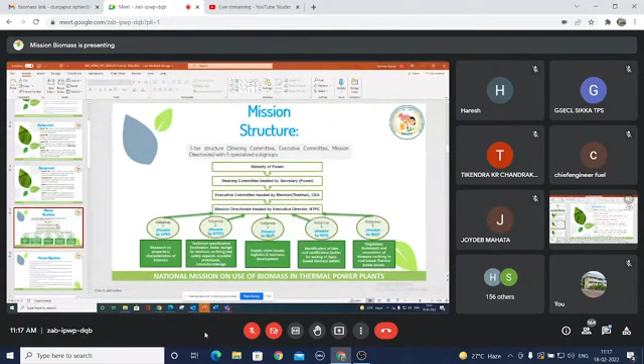Sir, now it is clear. You can start, sir. Sorry for the disturbance, sir. I think now it's visible to everyone. Can we go ahead, sir? Yes. Yeah.

So, sir, as I explained to you regarding the evolutionary journey of our mission, now I will talk something about the background, because we have to understand that a dream does not become reality through magic. It takes sweat, determination, hard work. The mission journey was not as smooth as it looks. The mission was carved out by the great vision of our visionary leader, persistent effort and a well thought out plan. Here in this slide, you can see every important step that led to this phenomenal start.

You can see that in 2017, there was issuance of a policy regarding biomass co-firing by the Ministry of Power and a subsequent advisory to all power plants and state governments by CEA. In September 2018, technical specification for biomass pellets was developed and shared with all. In December 2019, MOP constituted a committee under the chairmanship of Member Thermal CEA for developing methodology and to indicate rates of agro-residue based in pellet form.

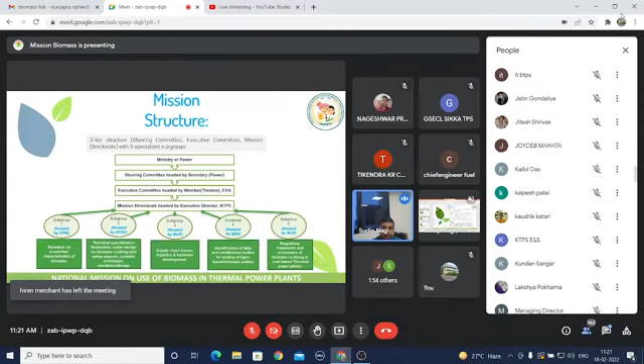Subgroup 3 was meant for taking care of supply chain issues, logistics, and business development. Subgroup 4, headed by BEE, was taking care of the identification of labs and certification bodies for testing of agro-based biomass pellets. Subgroup 5, headed by MOP itself, is taking care of all the issues pertaining to the regulatory framework and economics of biomass co-firing in coal-based thermal power plants. Next slide, please.

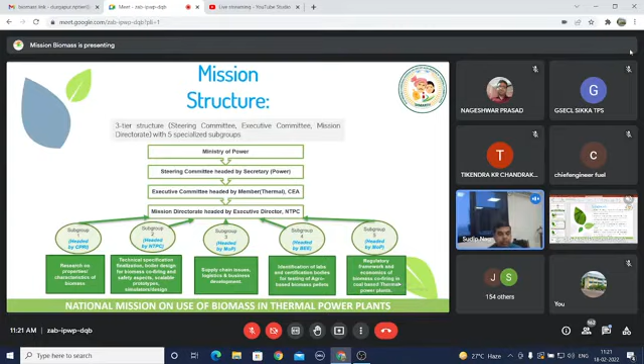biomass and boiler design to handle the higher amount of silica and alkalis in biomass pellets, to address the constraints in the supply chain of biomass pellets and agro residue, and training of personnel, to resolve the regulatory issues in biomass co-firing, to formulate mechanisms to provide initial capital and seed financing to encourage entrepreneurs and SMEs to establish pellet manufacturing facilities, to identify critically needed infrastructure and encourage necessary investment by working with government and stakeholders as well as industry and academia, to sensitize all stakeholders like ministries, departments, state governments, farmers, local bodies, agencies, etc.

It was also the role of the mission to prepare guidelines, release of RFQ, RFP and other requisite documents, selection of host institutes, signing of MoUs, release of funds, preparation and evaluation of budget, organizing meetings of expert committees and expert groups, etc. Next slide, please.

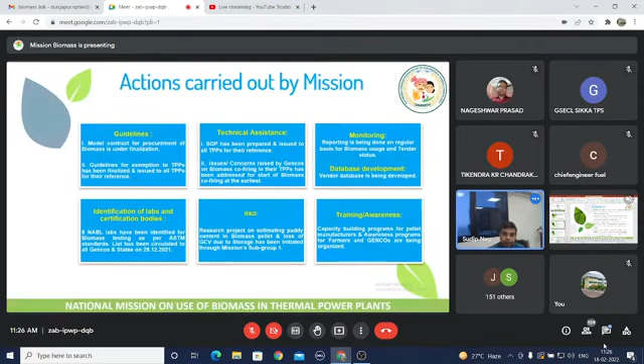Regarding monitoring, reporting is being done on a regular basis for biomass use and tender status. A database has been developed for the vendors. Identification of labs and certification bodies: 8 NABL labs have already been identified for biomass testing as per ASTM standard, and the list was circulated to all GENCOs and states in December 21. A research project on estimating paddy content in biomass pellets and loss of GCV due to storage has already been initiated through mission subgroup 1. Regarding training and awareness, capacity building programs for pellet manufacturers and awareness programs for farmers and GENCOs are being organized. Next slide.

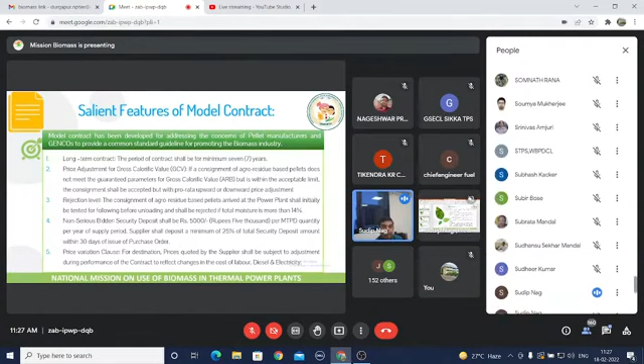As I was explaining regarding the model contract, it has been developed to address the concerns of pellet manufacturers and GENCOs and provide a common standard guideline for promoting the biomass industry. It's a long-term contract; the period shall be a minimum of 7 years. There is provision for price adjustment for GCV, provision regarding rejection, a security deposit for non-serious bidders, and a price variation clause: the destination price quoted by the supplier shall be subject to adjustment during the contract to reflect changes in the cost of labor, diesel, electricity, etc. Next slide.

Two farmers awareness programs have been conducted at NPTI Faridabad and Nangal for sensitizing farmers regarding the economic use of agri-residue. A total of 65 farmers participated in Faridabad and around 72 in Nangal from various districts of Punjab and Haryana. Next slide. Two capacity building programs have also been conducted for pellet manufacturers at Badarpur and Nagpur. A total of 82 manufacturers participated in Badarpur and around 60 in Nagpur on 30/11/21.

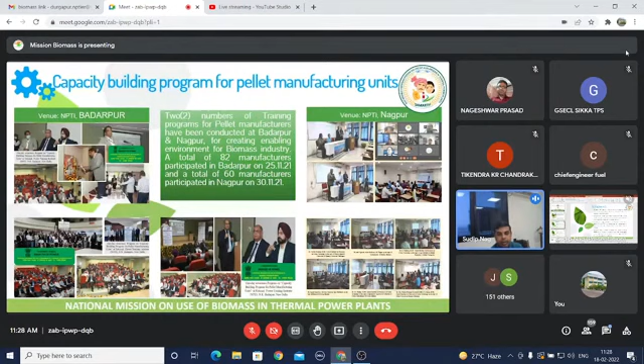So, Government of India came up with this co-firing of biomass that will solve all these problems, including improving the air quality index. It will create additional income, and it will definitely reduce the burning of agro residue, which is leading to this air pollution problem, as well as generate employment opportunities and establish decentralized pellet manufacturing, which will increase employment.

So, regarding the policy, in November 2017, Ministry of Power issued a policy regarding co-firing of biomass, in which it was not mandatory to co-fire biomass in coal-based power plants. But in the subsequent amendments and revised policy of 2021, it has been made mandatory to fire 5% biomass. Regarding the regulations, this policy covers two major regulatory aspects. Number one is renewable purchase obligation, the non-solar one, and the second is merit order dispatch. So let me cover the.

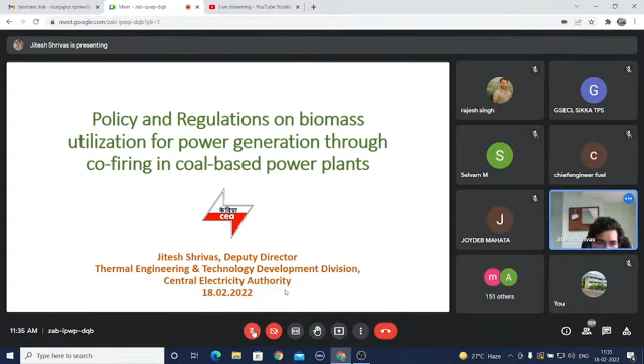Excuse me sir. Yes. Sorry, your presentation is showing hide. You are on the first slide only. I have not shifted it. Okay. Please remove the hide. Oh, okay. Is it okay now? Yes sir. Okay. So let me start with the presentation.

This is the background which has been discussed in the inauguration session as well as by my previous participant, that India generates a lot of waste every year, out of which a large part remains unutilized. So we have surplus biomass available in India. Around 40 to 50% of the total paddy straw is burned in the field. This can be utilized to generate power rather than burning in the fields. Biomass co-firing along with coal is a method of generating carbon neutral electricity through India's existing rich coal-based power infrastructure. So it will add on and reduce the stress on fossil fuels.

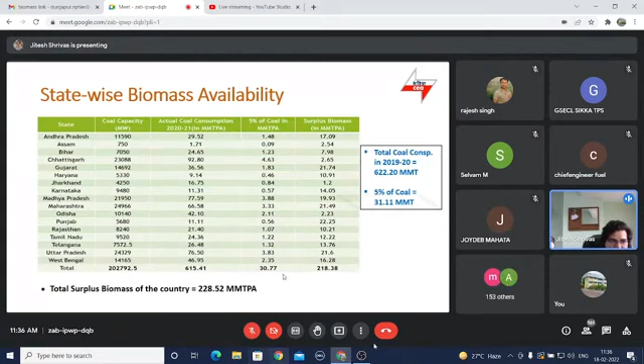Now in this slide, the objective is just to show that we have surplus biomass in the country. We have 228.5 million metric tons per annum of biomass available. We have covered 17 states, and there is data of coal capacity and the surplus biomass. So there are some statistics in this slide.

Okay, the benefits I have already discussed: it will eliminate or minimize the burning of agro residue. It will improve the air quality index. It will create additional income. It will encourage the establishment of decentralized pellet manufacturing and thus generate employment opportunities.

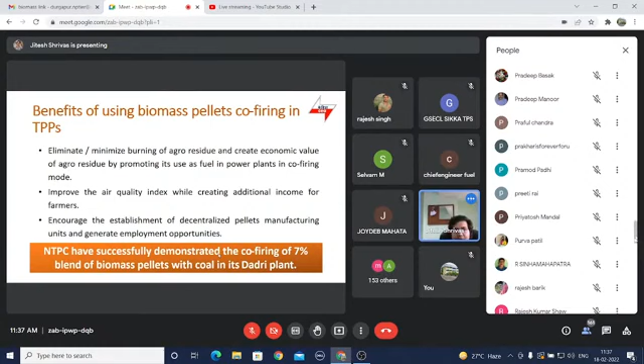The reason this biomass has come through is because NTPC has successfully demonstrated co-firing of a 7% blend of biomass pellets. So because of NTPC, this has been an encouragement, and therefore we have a policy on this. So in November 2017, the MOP came up with this policy.

All fluidized bed and pulverized coal units, except those having ball and tube mills, both for public and private generating utilities, the policy holds, shall endeavor to use a 5 to 10% blend of biomass pellets, considering the safety aspects. It is also said that CEA shall issue a specification for the pellets.

The appropriate commission will determine the compensation to be allowed for the increase in tariff for cost of generation on account of using biomass pellets. That will be taken care of through ECR, that is energy charge rate, or the change in law, which we will be covering in the subsequent slides. This is the regulatory issue, merit order dispatch. So the increase in cost of generation will not be taken into account for the purpose of merit order dispatch of electricity.

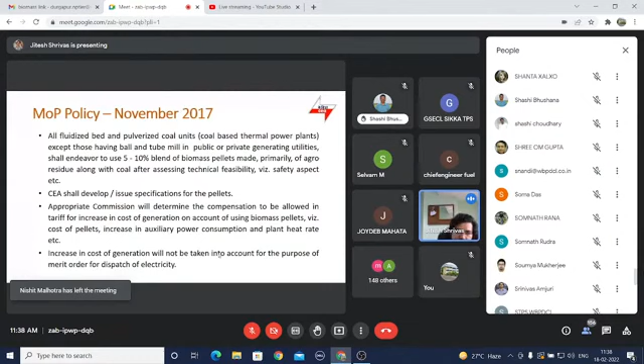With the coming out of this policy of 2017, there were a few committees and reports relating to biomass. Number one was the technical specification, which holds what should be the minimum criteria or technical specification of the pellets, both for non-torrefied and torrefied ones. Then, under the chairmanship of Member Thermal, CEA, a committee looked into the methodology for arriving at the rates.

So regarding the agro-based residue pellets, this was based on the calorific value. If I'm not wrong, for non-torrefied pellets the cost was around 1.9 rupees per kg per 1000 kilocalories, and for torrefied it is 2.1 rupees per kg per 1000 kilocalories. Right?

Then we also have other committees under the Additional Secretary, Ministry of Power, to look into merit order dispatch, the regulatory issue. So it has been decided that the increased cost will not be considered for merit order dispatch.

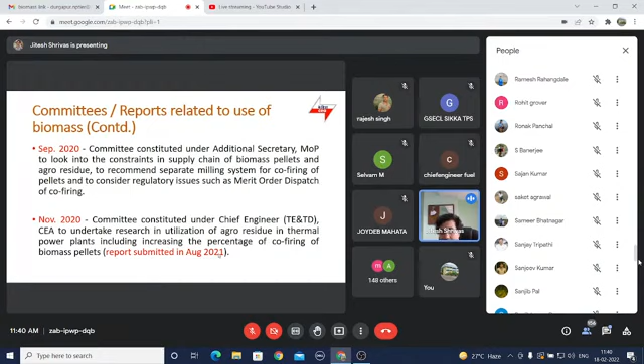Then we also have a committee constituted under the Chief Engineer, Thermal Engineering Technology Development, CEA, to undertake research on utilization of agro-residue in thermal power plants and increasing the percentage of co-firing of biomass pellets. The reports were submitted in August 2021. The areas of concern were the research areas identified in this report. Subsequent to which there have been subgroup formations under the biomass mission, which have been taking up this report's findings.

So after this policy, another regulatory issue: the non-solar renewable purchase obligations. The power generated from co-firing of biomass in coal-based thermal power plants is considered renewable energy, and this is eligible for non-solar RPO. So this was a major amendment.

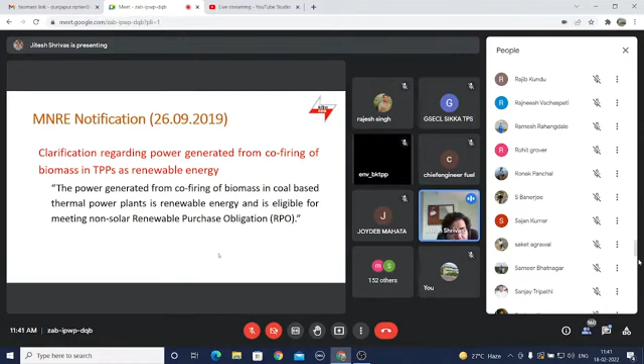Now, coming on to the MOP policy revised with subsequent amendments of October 2021, it made firing of 5% biomass mandatory. So for different types of milling systems, according to torrefied and non-torrefied pellets, we have this. For example, the bowl mill mandatorily uses 5%, and the obligation shall increase to 7% with effect from 2 years after the date of issue of this policy. The second one is the ball and race mill, which will be using only torrefied pellets. 5% is mandatory, and 2 years from the date of issue of the policy, the obligation will increase to 7%.

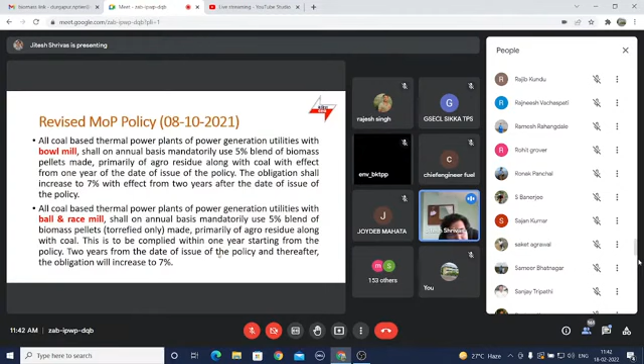Regarding the ball and tube mill, this will be using 5%, but the ball and tube mill has certain technical constraints. So for this one, the volatile content has been kept under 22%. Apart from this, we have cases, for example, a reserve shutdown, or not being able to operate due to merit order dispatch. If you have these constraints, then you have to increase the percentage of co-firing up to 10% in other operating units or plants.

Okay. Exemption and relaxation for co-firing. For example, if the power plants are seeking exemption for co-firing, that will be considered on a case-to-case basis. There is a 6-member committee headed by Chief Engineer TE&TD to look into this matter, and the representatives are from NTPC, BHEL, CPRI, Ministry of Agriculture, and Mission Directorate.

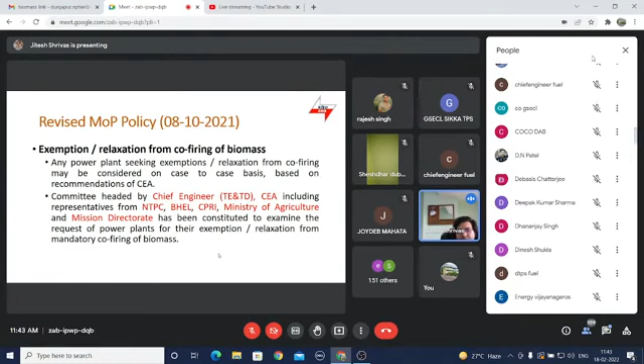Okay. So these are the key highlights of this one. The policy will be in force for 25 years. The minimum percentage of biomass for co-firing will be reviewed from time to time. Minimum contract period for procurement of biomass pellets by generating utilities is 7 years, so as to avoid the delay in awarding contracts with generating companies every year, and also to build up a long-term supply chain.

Okay. In the morning I heard that there was some query about the capex and all those things. So this slide is for Sir, who has asked this question. For projects set up under Section 62 of Electricity Act 2003, the increase in cost due to the co-firing of the biomass pellet shall be passed through in energy charge rate. And for projects under Section 63, the increase in ECR due to biomass co-firing can be claimed under change in law provisions.

Apart from that, additional cost on ECR shall not be considered in deciding merit order dispatch of the power plant, so it remains untouched. And obligated entities such as DISCOMs can meet their RPOs by buying such generation of co-firing, as per the MNRE notification 2019.

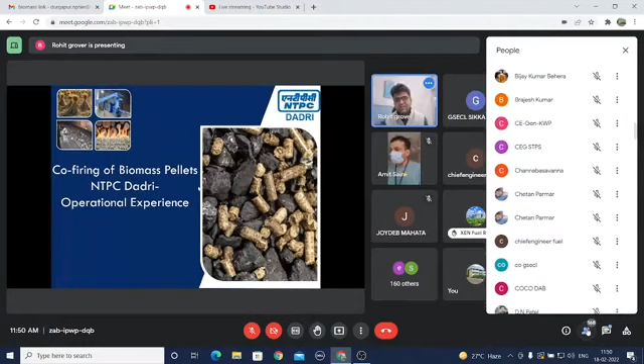We all know why we need to fire biomass—this was because of the huge smog which left Delhi NCR paralyzed due to air pollution. So we won't discuss much on this.

We'll focus more on the technical part. My presentation will discuss some background, the first phase trial run of operation—how we started it, what is NTPC Dadri's experience over a period of time, what requirements you need for any power plant before going commercial, what the SOP is, and what is the way forward.

As previous presentations mentioned, we have a huge stock of biomass lying in the fields which is being burnt unnecessarily and creating air pollution. So we can bring that into the economic value chain, creating a win-win situation for nature, air, power producers and farmers, and also generating jobs and employment opportunities.

In 2017, because of the 2016 smog, NTPC Dadri was selected as the pilot project for implementation of co-firing pellets with coal. As operations people, we are totally scared when asked to burn any new fuel in our boiler which wasn't designed for it. There were many perceptions and apprehensions about whether this fuel would be sustainable, whether there would be fire risk, or whether it would lead to mill choking. All these problems were discussed before firing in NTPC Dadri mills.

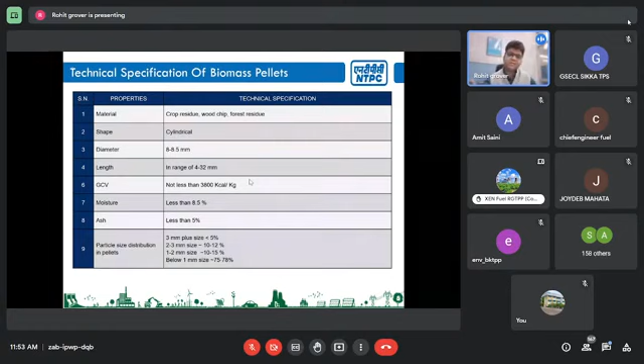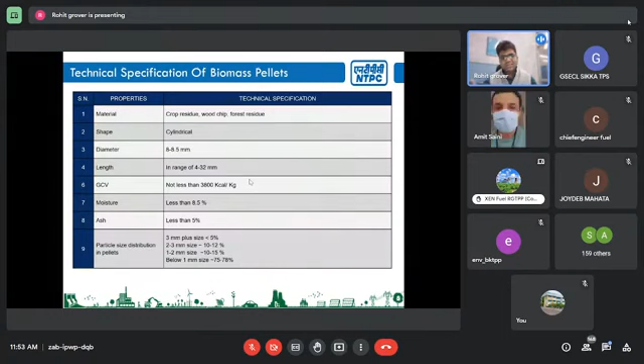Before firing, we need to indent the pellets from the pellet manufacturer. These are the specifications we raised and received at our plant—what should be its shape, length, kilo GCV, and moisture content. Moisture content is very important in pellets because they are hygroscopic in nature and catch atmospheric moisture very easily. So moisture content is important since we accept or reject a lot based on it, as we'll see in coming slides. Particle size is also mentioned here.

This slide is technically important—it shows the distribution of proximate analysis of 100% coal versus 100% biomass. As you can see, most parameters are the same. Regarding GCV, gross calorific value used in NTPC Dadri is around 3200 to 3800 kilocalorie per kg. With 5% biomass blending, it more or less remains the same, as shown in the last column.

What is concerning is the volatile material column—volatile matter contained in biomass is huge, around 67%. This is a huge concern for an operation engineer at a power plant, because I need to think about whether my mills will be able to pulverize that, and whether there will be any ignition in the mill itself. This was a concern because for 100% coal, volatile matter is just 22% in Indian coal, but in biomass it's 67%.

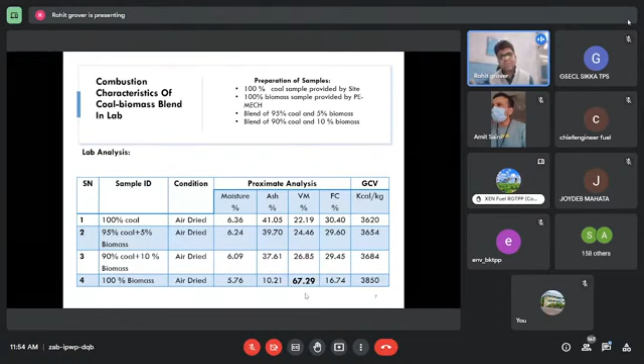So that is all which led to whatever you will see, what are the precautions which we are taking, what SOPs we have formed. These are all more or less related to this because of high volatile matter content in biomass.

So basically, if you are firing biomass... your slides are not visible to us. My slide is not visible.

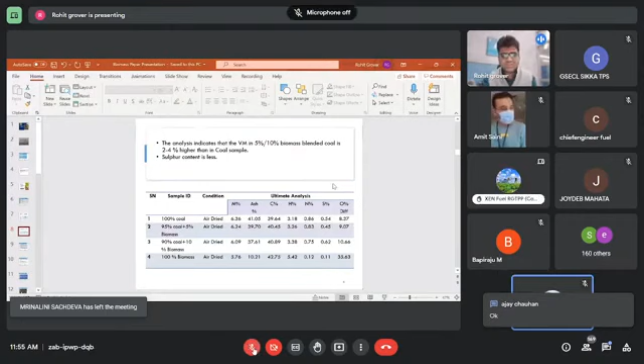Okay, then let's come back to the topic again. So what I was trying to prove with this slide is that the nitrogen content, atomic nitrogen content, and the sulfur content in the coal and in the biomass.

In biomass, you can see it is less. So if we are blending any amount of biomass, we are basically contributing less sulfur dioxide into the atmosphere. So less sulfur dioxide, less nitrogen dioxide and NOx content. This also helps the environment, and we are helping in greenhouse gas reduction, which we all know is happening if we are blending, for any amount of blending it is helping in that.

So what our NETRA wing did was the combustion analysis of the biomass sample. The first point they got was that volatile matter in the biomass starts releasing at 200 degrees Celsius. The volatile matter present in biomass, we know, is 65-67%, and it starts releasing at 200 degrees Celsius.

While in case of coal, it starts releasing beyond 300 degrees Celsius, so beyond 300 degrees Celsius. So we know that as an operation engineer, what we monitor is the mill inlet temperature.

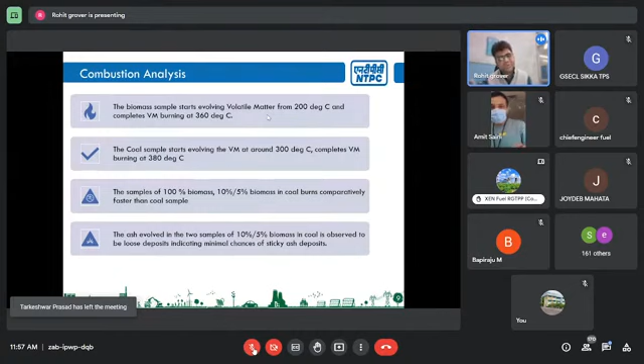That is the cause of concern, because if I am keeping my mill inlet temperature greater than 200 degrees Celsius, there is a chance that the volatile matter present in the biomass might get released, or will definitely get released beyond 200 degrees Celsius. Then, if it reaches the ignition temperature, it might lead to fire in the mill itself, in the coal pipe itself, which we don't want as an engineer, as a desk engineer, as a unit controller. We don't want that. So this was the cause of concern, and this required that we keep the mill inlet temperature below 200 degrees Celsius if we don't want any fire to happen in the mill.

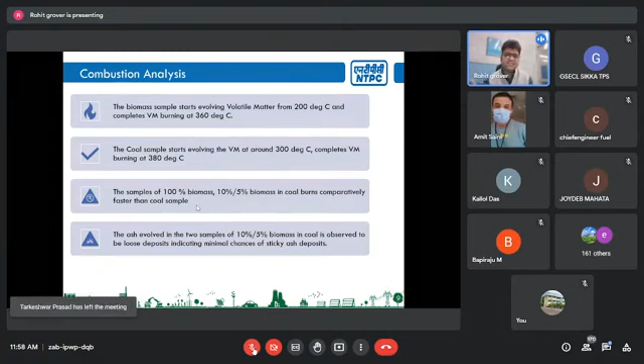Now, second thing was, we know that volatile matter content in the coal starts releasing at 300 degrees and completely burns at 380 degrees. The samples of 100% biomass, 10% biomass and 5% biomass completely burn, and they burn basically faster, because there is high volatile matter content in biomass. So if we are blending the biomass, we are increasing the volatile matter content of the whole sample itself, leading to faster burning of the coal sample.

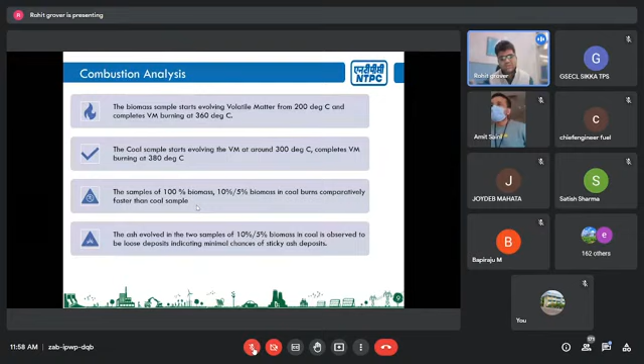Also, a prime cause of concern is that when we burn any fuel, the ash content left behind is also a cause of concern. That ash content should not be such that it hampers the boiler or deposits in the boiler. So with 10% blending, it was observed that it is not hampering any water wall tubes or superheater tubes or anything like that. So it was not a matter of concern that it would affect our boiler in terms of ash deposition or ash fouling point increase.

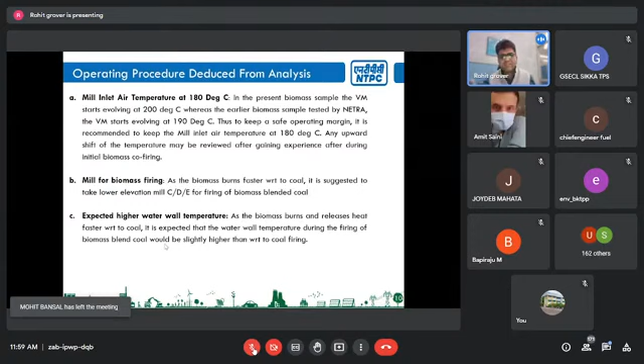So the basic rough operating procedures which we deduced from this analysis was that we have to keep the mill inlet temperature at 180 degrees Celsius. On a safer side, we kept the mill inlet temperature at 180 degrees Celsius, because we don't want any volatile matter to release in the mill itself during pulverization.

And then, as we know that biomass burns faster with respect to coal, it was suggested to keep the lower mills in service, like C, D, E. Suppose if there are 6 mills A, B, C, D, E, F, we tried to first start firing in the bottom mills C, D, E, so that if it is burning faster, it will help.

We had some apprehension that it will lead to reduction in our superheated temperatures, but it didn't happen so, which I'll share in the subsequent slides also.

Then we expected higher water wall temperature, as I mentioned that biomass burns and releases heat faster with respect to coal, so it was expected that water wall temperature will be higher, but it was just slightly higher. It didn't hamper any boiler parameters or superheated temperatures, which I'm going to show in the subsequent slides also.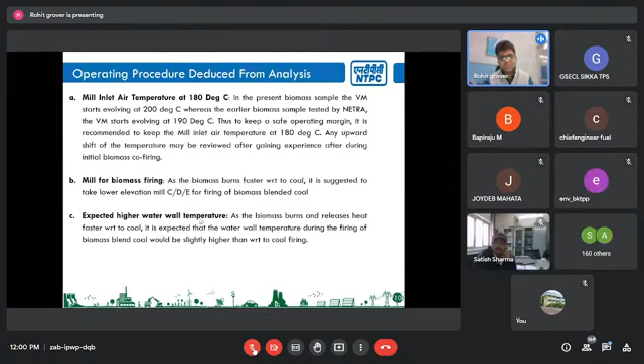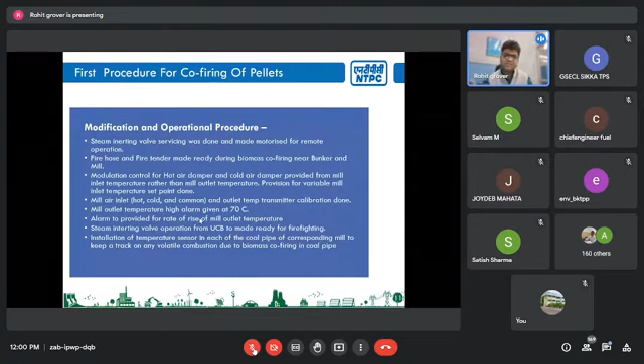Then, regarding the operating procedure modifications done when we were charging biomass firing for the first time: the first and most important point is that we serviced our steam inerting valve. As an operation engineer, we all know that a steam inerting valve, in case of any mill fire, is a valve provided for steam dumping in the mill to prevent fire from spreading. That source of steam inerting is mostly aux PRDS, which is present in our boiler units.

So that steam inerting valve, since we were firing coal, was mostly redundant and not in operable condition. So before firing this blended mixture, we serviced our steam inerting valve, and we also provided one motorized valve in series with it.

Earlier, in the original drawings of the 210 megawatt and 500 megawatt units provided by BHEL, the design was that there was only a local manual valve provided near the mill. Within each individual mill, there was one manual valve. So in case of any mill fire, we used to open that valve, and then the mill fire could be stopped.

But since it was decided to fire biomass, to make it easier for operation engineers, a motorized inerting valve was also provided in the control room itself, and its operation was tested. So in case of any mill fire, that valve could be opened from the control room, and the mill fire could be stopped. That was a prerequisite before firing any co-firing or blended fuel.

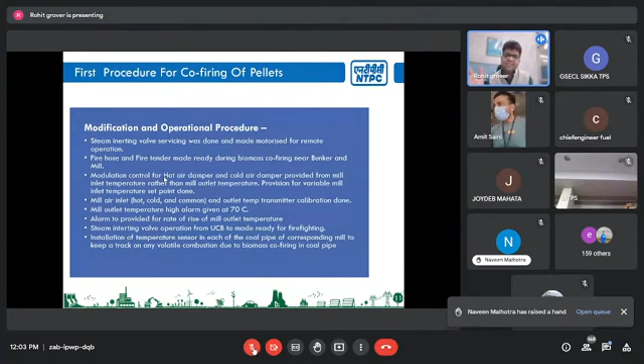Then modulation control for the hot air damper and cold air damper was also provided. This is the part where logic comes into play. We all know that when we fire fuel in the mill, the amount of air is decided by the hot air damper, and the outlet temperature of the mill is controlled by the cold air damper. Suppose if I keep my outlet temperature at 80 degrees, the cold air damper opens according to the requirement, and the mill outlet temperature will remain at 80 degrees.

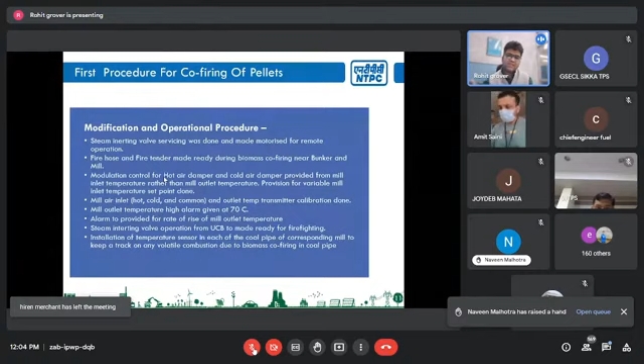But now my main point is not to maintain the mill outlet temperature, it is to maintain the mill inlet temperature, as we've seen in the previous slide, which needs to be controlled below 200 degrees Celsius. So with the help of our C&I team, the logic was modified, and now the cold air damper operates based on inputs from the mill inlet temperature. Then different alarms were provided in the mill UCB, for timely action by operation engineers.

So if any mill is being selected into biomass mode, then if there is a mill outlet temperature greater than 70 degrees, there is an alarm. If there is an increase in mill outlet temperature, there is an alarm. So there are different alarms also provided.

And also there were 4 different temperature sensors which are provided in the different coal pipes also. In tangential firing, a mill provides 4 different pipes which go to every corner of the boiler basically. So in each and every pipe there was one temperature sensor provided to monitor whether there is a fire in our coal pipe, whether there are no fire incidents in our coal pipe. That was also provided.

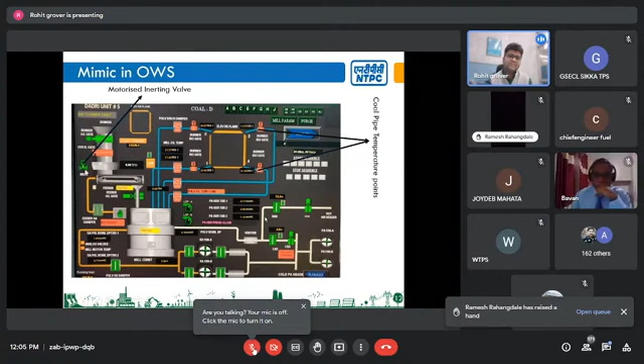Now this is the mimic. What I have told, this is the max DNA mimic which is provided in our control room. So this is a mill page, basically mill Delhi page, as you can see, coal D. In our terminology we say D for Delhi. So this is the mill. These are the 4 temperature points which were additionally provided to monitor the coal pipe temperatures. And this is the inerting valve which I was talking about. This is the motorized valve which is provided additionally in the mills readied for biomass firing.

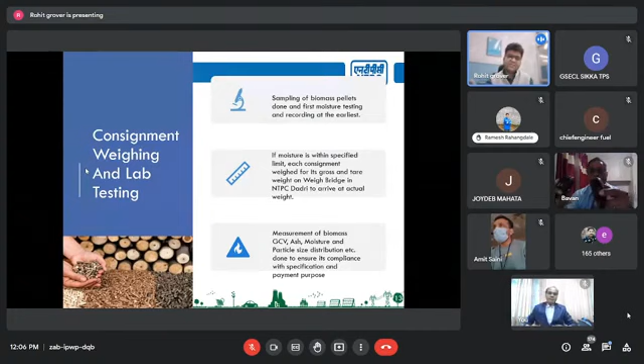Now, as this was all about the SOP, whenever we get any consignment, our chemistry department receives the pellets, takes the sample, and measures the GCV and the moisture. If it is in the acceptance range, we receive that consignment, and then it is sent to our CHP yard.

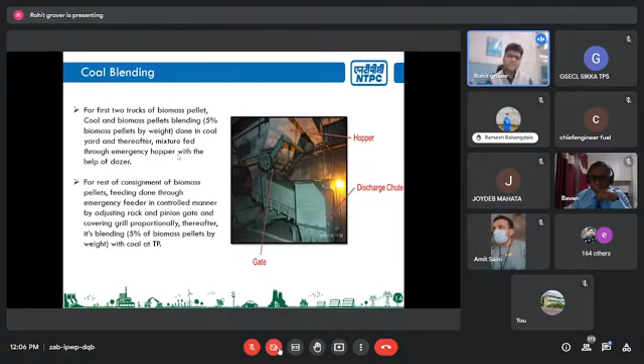So what we did was how to do blending. That's also a major question, because now there was a separate hopper, which was previously not in use, used to store the biomass, and with the help of this rack and pinion arrangement, the opening of this gate allowed us to drop the amount of biomass which we wanted to blend. So you can say it's a rough estimate, but we tried to do it that way. So we did the blending for 5% initially.

So there was a track hopper. From there coal was being carried and lifted to the transfer point. That transfer point is basically this one. Below this, the conveyor belt is going for the coal, and above that, we are feeding the biomass over it. From the emergency hopper, the biomass is fed to the transfer point. And from the transfer point, that blended fuel is sent to the coal bunkers.

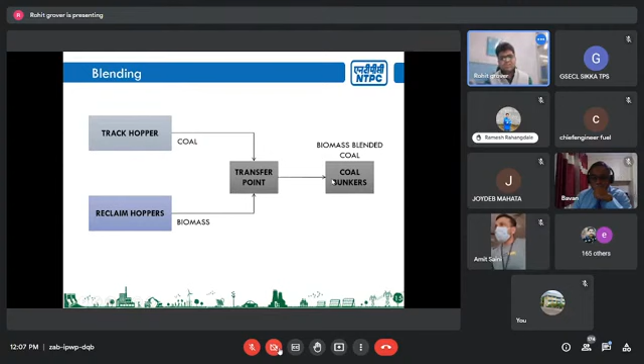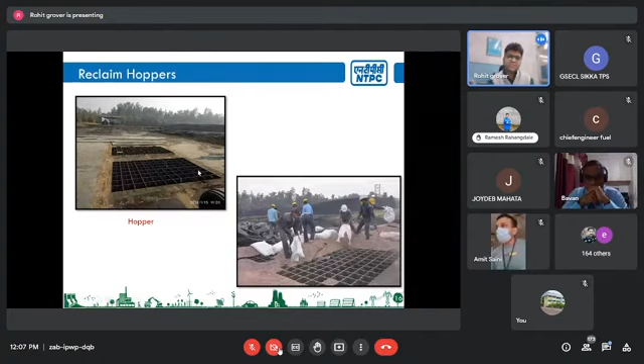So this is the hopper which we are talking about. When we receive the pellets, this is how they were manually unloaded over this hopper. But now a truck tippler has been installed in NTPC Dadri because receiving pellets has become a regular phenomenon, so this is not done manually now. These pictures are from the first time it was blended. We received the sample, then it was collected in the hopper lying below this. This is the blended mixture which is being carried by the conveyor to the bunkers.

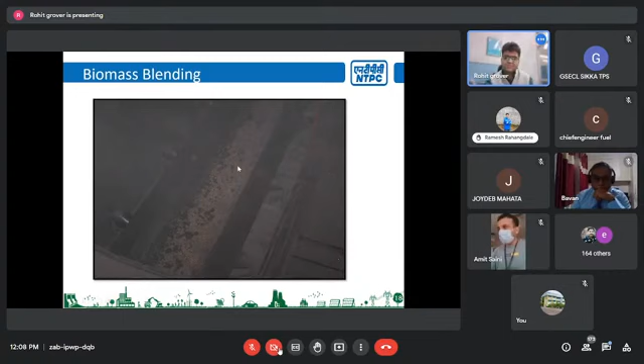Now, for the firing for the first time, we made sure that the mill outlet temperature should be in the range of 60 to 65 degrees. Mill inlet temperature should not be more than 180 degrees, as I have mentioned. The PA header pressure was kept slightly higher. Normally in our mill, it is recommended around 740 to 760 mm of water column. The primary air is the air which removes the moisture from the coal and carries the fuel to the boiler itself.

That pressure was kept slightly higher because we were apprehensive whether our fuel would be lifted from the mill or not. And then pre-start and post-shutdown purging of the mill was also made mandatory. And all the mill parameters were monitored on a continuous basis.

Now, the last line is very important because we made sure that mill inlet temperature should not go beyond 180 degrees Celsius. Just to make you aware, earlier there was only one point available for mill inlet temperature. So, for increasing the redundancy, another point was provided for mill inlet temperature. So there were two different points from where our PID controller was taking the command.

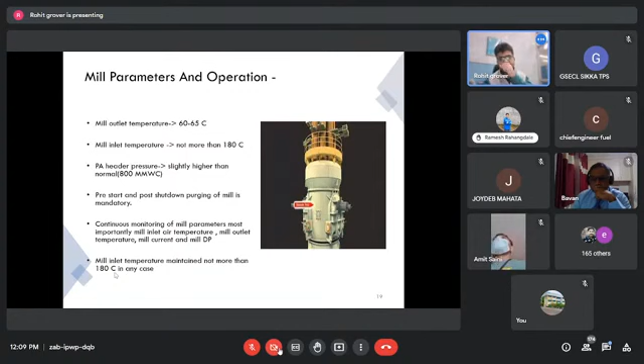Mill reject system was also kept ready and it was kept under observation. Then local operator was also deployed. In case of fire also we had prepared some SOP, कि अगर आग लग जाए, in case अगर हम पहली बार जब fire करें, अगर आग लग जाए तो क्या करें? But to assure you, in the last 6 to 7 years of our co-firing of biomass with fuel, no fire incidents have been reported till now.

Now, fire tender was also deputed, and then the flue gas temperature was also monitored in the superheater zone, and then clinkering and slagging tendency was also monitored with the help of local people, and with the help of bottom de-ashing time also. Soot blowing and LRSB also were kept ready, in case there is any deposition of soot, so we should be prepared for anything. This is all which we are talking about when we were charging it for the first time.

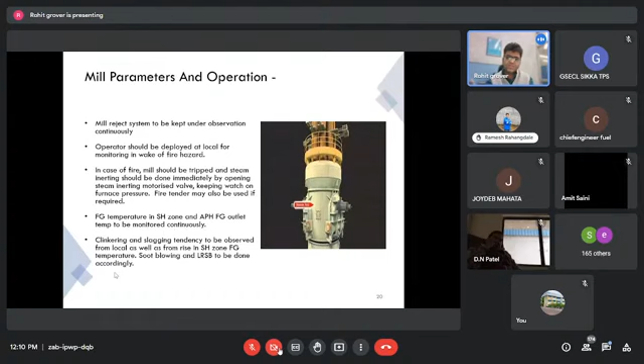But now the things have become much more simpler. This is just the apprehension which you all must be having, कि अगर हम अपने boiler में fire करेंगे first time, then how our boiler is going to react. This is just to share the views.

Then whatever the observation was, इसका कोई एक performance log हमने तैयार किया था. We prepared the performance log. And the unburned carbon in the bottom ash and the fly ash was also tested. Then effect of co-firing on SPM, the SOx and NOx is also monitored. The evacuation time of fly ash and bottom ash was also recorded just to make sure that it is not affecting our routine operations. And then mill reject and classifier was also checked, कि कहीं ऐसा तो नहीं कि if we are pulverizing biomass along with coal, it is affecting our mill.

So this is the timeline which we did in 2017. It was done in 3 phases, as I have mentioned, 5, 7% and 10% of blending. In 2018, we started the commercial co-firing of biomass at NTPC Dadri, and in 2020 we started biomass firing for the first time in the 500 megawatt units also. Now all the 6 units are ready for biomass firing.

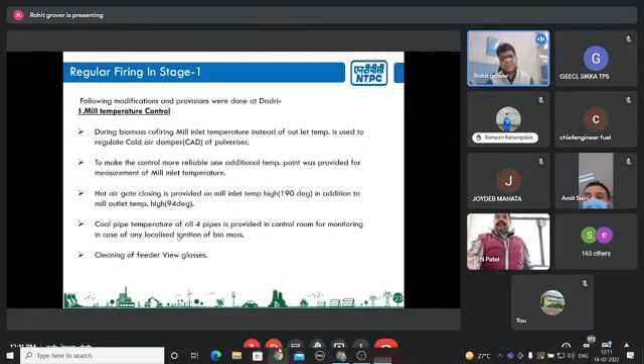So suppose we are talking about 5F mill. If this mill earlier used to be run on the normal mode, we change that mode to the biomass mode as soon as कि हमारा biomass जैसे ही आने लगेगा. Now, how do we get to know that biomass has come? Because we all know that bunker height is around 24 meters. So below 10 meter it is purely coal, and above 10 meter, going from the top, it is blended fuel. So that is very important.

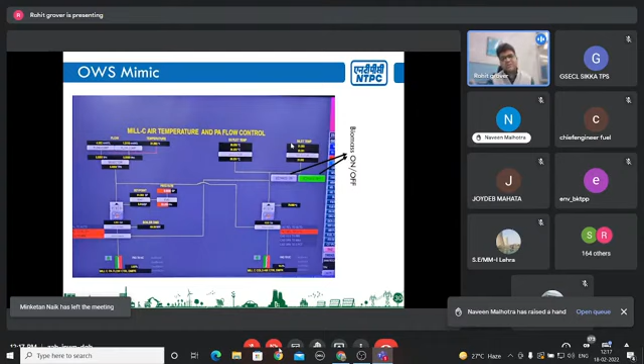One protection is also provided: in case the mill inlet temperature reaches beyond 190 degrees, the hot air gate closes. The earlier protection in the mill, which we all know, was that in case our mill outlet temperature goes beyond 95 or 105 degrees, different set points in different units, तो hot air gate बंद हो जाता था. But now in this setup, if you select biomass mode on, the hot air gate protection switches to the mill inlet temperature. So if mill inlet temperature goes beyond 190 degrees, the hot air gate will get closed.

So once we have brought the mill inlet temperature to 175, 170 degrees, we can put biomass mode on and then put the CAD and HAD in auto with the respective set points. Now the mill cold damper will shift to mill inlet temperature, and we can decide the mill outlet temperature according to the mill loading. Suppose the mill outlet temperature is coming low, then we can decrease our mill loading and increase our mill outlet temperature.

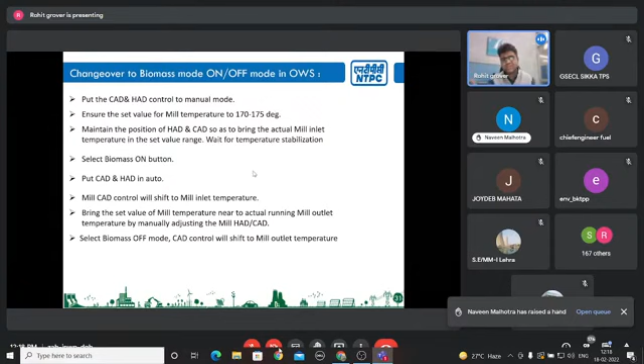Now these are some of the do's and don'ts. In case agar fire lag jata hai, there are certain standard SOPs which we all have developed in our plant regarding firing of biomass. So these are the SOPs, do's and don'ts which we have made in case of NTPC Dadri.

Agar kisi mill mein aag lag jata hai, call the CISF personnel or the fire wing, whichever is present in your plant. Increase the feeder speed to maximum so that we are dumping the fuel. Stop the feeder after a few minutes, then close the hot air gate and cold air gate from the control room. We don't supply any air because providing any amount of cold air or hot air will basically provide oxygen to the fuel which is already under fire.

So, agar fir bhi control nahi ho raha, then we admit our steam inerting: open the steam inerting valve and dump the steam. But this is just the last step, last resort. As I have told you, in our 7 years of co-firing, no such incident of fire has happened in the Dadri plant.

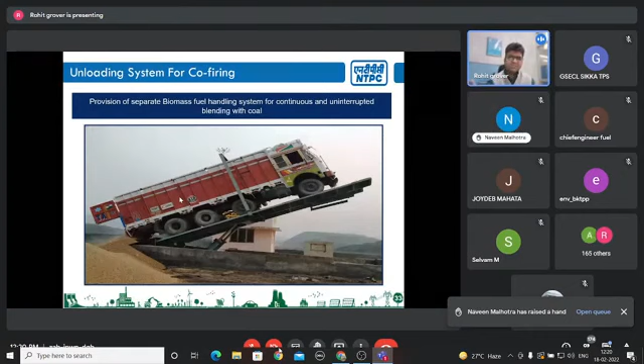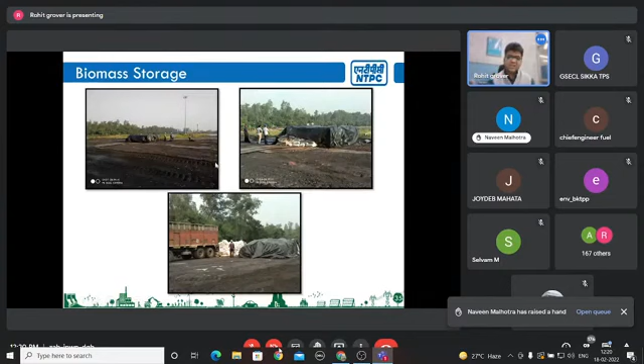Thank you so much. This is how biomass is received, how it is sampled, and this is how it is unloaded. This is how the biomass sample is stored. As I have told you, this is hygroscopic in nature. This is the previous year's storage of biomass pellets, but now a shed has been created to store the biomass pellets at Dadri itself.

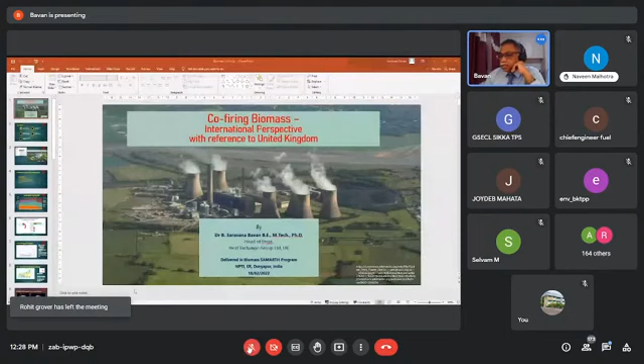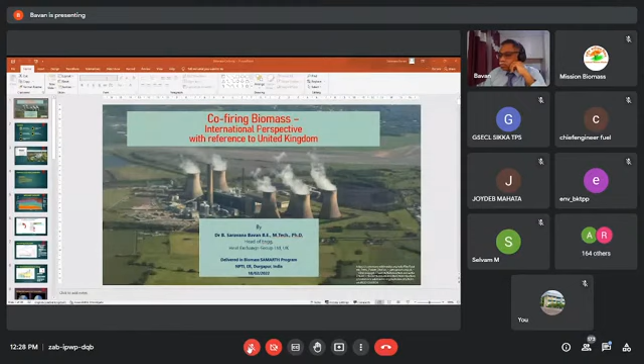Okay, right. In the main screen it comes my photo, but I wanted to share my PowerPoint presentation. Sir, you will have to share your PowerPoint presentation to the live stream. That's what I'm doing. Just 1 minute. Sir, you have to reshare your entire screen, not only tab. Oh yeah, I'll do that. There is a kind of storm here in the UK, so my internet connection is a bit slower today. Sir, full screen, please. Sir, could you please put it on the presentation mode? Yeah, I put it that way. I have two screens. Now you can see my screen? Not yet, sir. You have to reshare your screen. Can you now? Yes, sir. Now it is. Okay, that's great. Sorry for the technical glitch.

Co-firing biomass is not new for me. When I joined the UK company called Alstom Power in 2007, my major work was to blend the biomass.

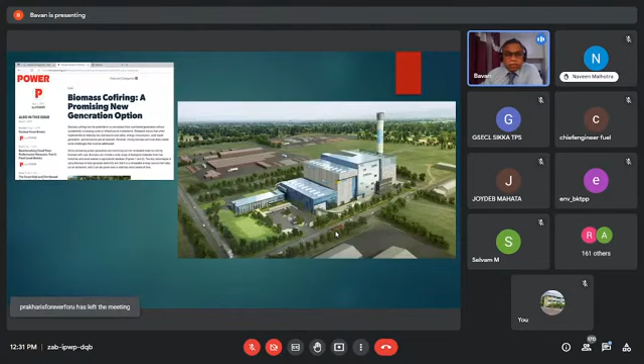Biomass co-firing was considered a promising new option. It was mentioned in 2011, and now in India this is coming up in 2022. So we are slightly delayed in these kinds of processes, but as my previous presenter, Mr. Rohit Grover, explained, they have already started testing, and these tests are coming into the system. In the background you can see what a typical UK power plant looks like.

So now you can think about the plant in the UK and how it compares with coal-fired plants in India. When I first visited here, I was really surprised, because I visited many plants, especially NTPC Badarpur a couple of times during my tenure at NPTI Faridabad. I could feel that housekeeping and other practices are much better in the UK because they are legally required to do so.

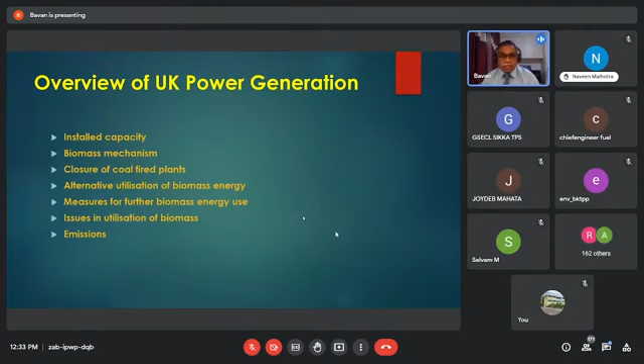When we come to UK power generation, actually it's slightly in a mess. I will cover that a bit later. The installed capacity is something like 60 to 70,000 megawatts, that's the normal range.

From 1996 to 2020, the UK's capacity increased from about 70,000 to nearly 80,000, but never beyond that. In the same period, India almost tripled its power generation. In 1996, India had less than 100K installed capacity, whereas nowadays it reaches more than 350K megawatts.

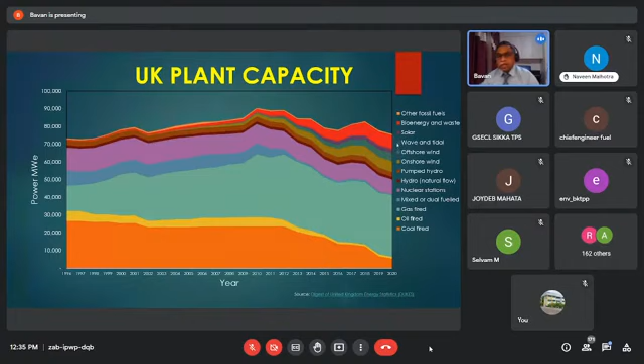Nuclear has provided almost similar output but not much. Hydro is also the same. There's some offshore wind and wave that have come in, relatively low. But if you consider the actual power generation, this happened last night - I just checked with the grid what was happening.

You can see here it was around yesterday night, 11:45 UK time. The total load was about 26,000 megawatt, out of which renewables provided 37% and carbon neutral fuels 51%. So these values, more than 90%, are related to carbon neutral fuel. The real coal and other things have been considerably reduced.

I provided a link here - if you click it, it shows the latest power generation data. I can share this on the screen. So this is the latest one, and now it's live, about 6:40. I just checked that. You can refresh every 10 minutes or so.

So it's about 28.5 gigawatt, out of which wind is providing about 41%. Last night it was 27%, now it's actually 41%. So there's a big difference in this, and coal is actually coming down.

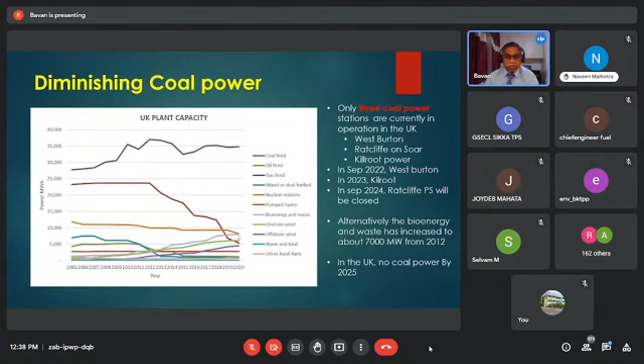During this period of closures, you might have seen biomass actually increase from almost nil to about 7,000 megawatt - that's the blue curve you can see. From 2005 it was virtually none, now it's almost reaching more than 7,000 megawatt.

If you consider renewable sources, the main contributors are mixed fuel and dual fuel, which is diminishing, pumped storage which stays about the same, and bioenergy and other waste which are increasing. Offshore wind has tremendously increased, and wave and tidal are also picking up, so power generation is now more or less towards a renewable base. Biomass alone, last night, contributed about 8% to the grid.

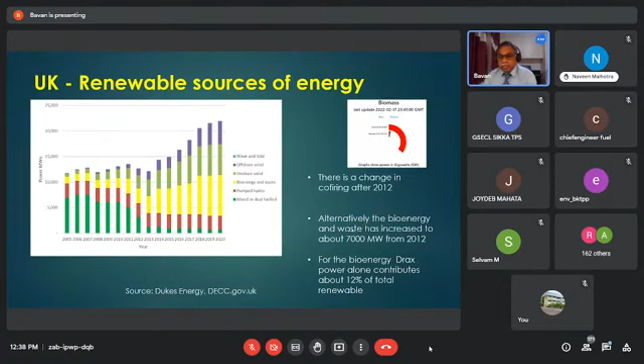In the electricity supply, the base is coming from installed capacity at 53% wind, and the available generation is 50%. In some cases it even reaches as high as 66%. Nowadays co-firing is contributing about 20% of the generation.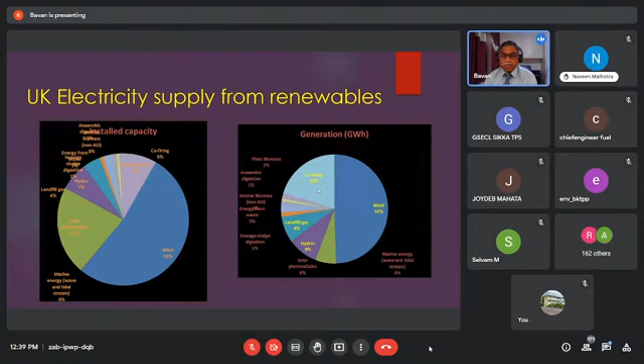This is the scenario in the UK, but the problem now is since we are majorly depending on wind and natural gas, sometimes the wind creates an issue and power generation gets affected, so it needs to be fulfilled by natural gas, which we need to import from elsewhere. The political situations in Ukraine, Russia and elsewhere have severely affected this. All the power plants in the UK have been almost privatized, and because of that, no other privatization companies are ready to invest in energy. So in the future, if any energy increase happens, the UK government would be really in trouble for meeting this power generation demand.

On the other hand, being the end user, the people who pay the bills are controlled by a government organization called Ofgem, which controls the prices and puts limits on price rises. Because of that, this year and last year many power supplying companies have gone bankrupt, and only a few companies are working. Recently they have increased power prices by almost 60 to 70%, and it is expected to increase further, so the power generation or providing cost is almost doubled. People are feeling trouble because of this higher increase within a year, having to pay almost double the prices. So this is not a sustainable pricing policy, but this is the situation in the UK now.

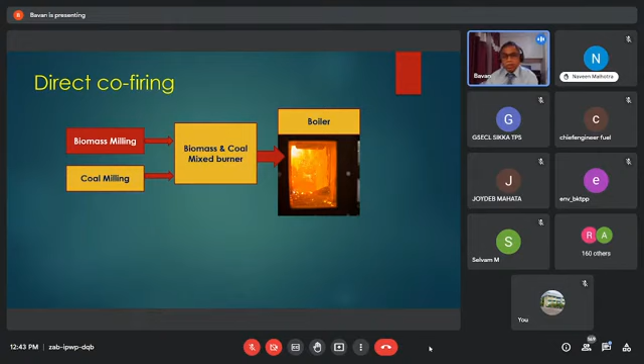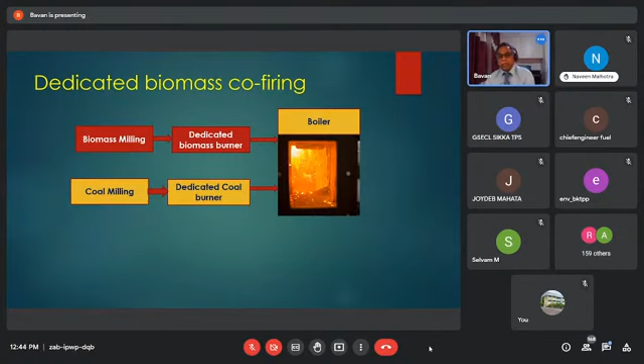In dedicated biomass co-firing, there is a dedicated burner that exclusively burns the biomass, which is also placed in the boiler, while the existing coal milling process remains with its own dedicated coal burner for firing. So the coal milling and burning process are separate, and the biomass milling and biomass supplying process are separate—these two things are considered separately.

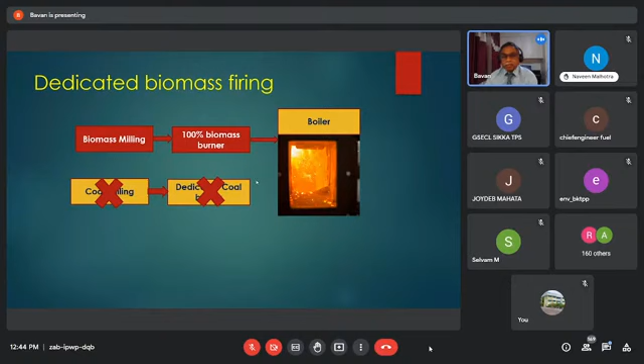The next step is why we should use coal alternatives. So they've stopped using coal and increased the number of burners, and considered biomass milling, which is used for 100% biomass. This is dedicated biomass burning. I have worked on co-firing and dedicated firing, and mixed all three varieties in various projects in the UK.

The main thing is, when doing this firing, the main plant considerations are either retrofitting the existing plant, or going for a new plant, and what is important to consider and apply. If you go for retrofitting, these plants are cheaper because you are doing very limited modifications.

However, you cannot completely redesign it, so you need to have some limitations of co-firing. People say about 5% to 20% is the normal range for mixing biomass into the existing system. With this plant, you can do a quick turnaround, for which you need biomass characterization based on the biomass you're going to combust, design your biomass burner, and then integrate it into the system.

There are requirements in the heat transfer materials, like membrane walls, superheaters, and reheaters, and these materials need to be capable of withstanding biomass firing, because some of the nasty materials present in biomass would be harmful for the plant's life.

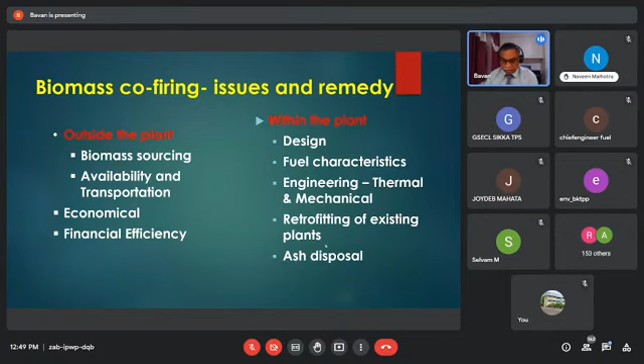Within the plant, you have design issues, like whether the existing plant is capable of burning the suitable biomass, what the fuel characteristics are, what the effects on thermal and mechanical systems are, and whether retrofitting the existing plant is possible. If it's possible, then how much will it cost, and what additional ash disposal systems need to be covered.

And for biomass co-firing, the engineering capabilities any country needs are: you need to apply proper due diligence, you need to identify the fuel source, you need to execute long-term fuel supply contracts, and how it is applicable to the existing stations, because that needs to be studied, and you need to have a hazard and operability study when you are working on this biomass.

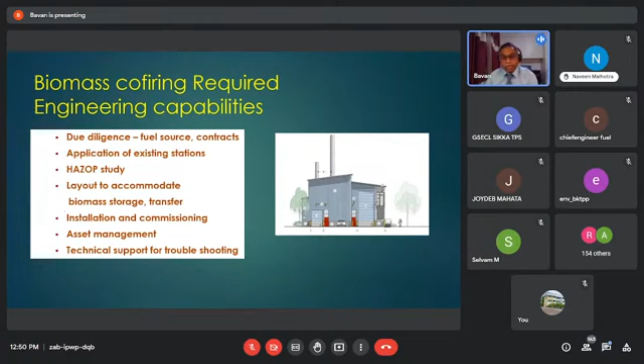What are the additional issues you have to manage to keep the plant safe and the people working in the plant safe? And you need to provide additional layouts to accommodate the biomass storage and transfer, installation, commissioning, and you have to have proper asset management of these biomass utilities. These are very common for all coal-fired plants, but we need to apply them specifically for biomass as well.

The next step was, people are thinking of using biomass and waste; if it's possible, we can use them together. And what technologies are available if they are going for dedicated biomass? There's combustion, which is the normal power generation we do in India, and there are other processes like pyrolysis, gasification, and biogas generation, which are also possible with biomass.

In India, biogas generation using animal manure and other things is a long-standing story, and that's the part biogas generation fulfills. The gasification and pyrolysis technologies are yet to be developed, or not much involved in the Indian environment. Whereas in the UK, some pyrolysis plants are working, and I personally worked with a few plants which are in gasification mode.

In the gasification plant, the biomass is subjected to high temperature in advanced gasification technologies, where the gas contains mainly methane, and that gas is combusted in a burner in the boiler, and from that the heat is generated. With this, the process is cleaner and more efficient. Additional gasification technology is needed instead of the direct biomass, but it is more efficient, you can segregate the waste, and the boiler plants are capable of running for a longer time.

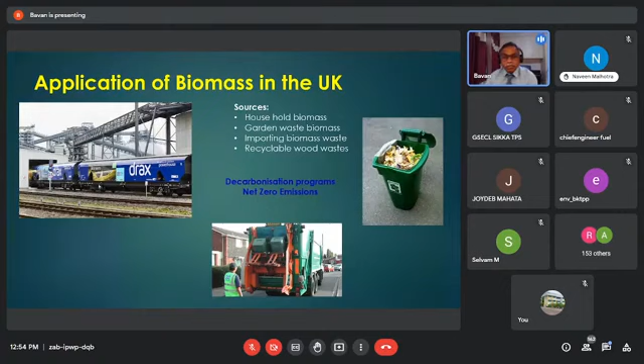In addition to that, biomass is imported from elsewhere. The government provides funding mechanisms. There are direct funding mechanisms and indirect funding mechanisms. The direct funding mechanisms comprise demonstration, R&D, pre-commercial deployment, and landfill levies. And this landfill levy is the important thing I want to tell you.

When the waste collected from our homes is deposited in the land without any processing, for each ton the collecting company needs to pay about 80 pounds, which is about 8,000 Indian rupees. That means each kilo costs 8 rupees, whereas in some places in India rice is provided for 1 rupee per kilo. So here the waste itself is costing about 8 rupees. That's the cost they fix for landfill. Because of that, the collection companies and councils want to avoid that cost, so they want to avoid landfill. So it is encouraging in a way.

In the indirect way, the government provides a renewable obligation certificate. That means any plant provider who wants to put up a plant has to first apply and mention how much power he wants to supply to the grid and how much of it is coming from renewables, and for each certificate, based on the prices, they will be given some kind of reward, in addition to the power selling price.

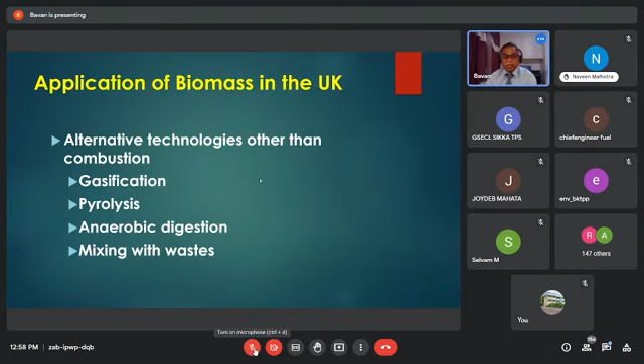The applications here, as I mentioned, are gasification, pyrolysis, anaerobic digestion. I've worked on a few plants with gasification and a few plants on anaerobic digestion, and I will show you all these things. This is the dedicated biomass, DRAX 1, where I was involved with the modification of the existing plant to run on 100% biomass. The plant started in 1974 and expanded in about 1980. It was about 4,000 megawatts. Currently about 2,000 megawatts are converted into dedicated biomass burning, and wood pellets are used as the biomass fuel.

The interesting part is in 1990 this was privatized, and it was acquired by a company called National Power, and later by AES Power Corporation USA, and these companies went bankrupt in 2003. Then the investors in the previous AES Power Corporation formed a company called DRAX Power, so this plant is now owned by many institutional investors, mainly pension fund providers.

Since then they have applied different emission control technologies, like flue gas desulfurization, BOFA, and boosted over-fire air, which is needed for coal firing with NOx reductions. Then they converted this in 2013 to full dedicated biomass firing, and wood pellets are used in this.

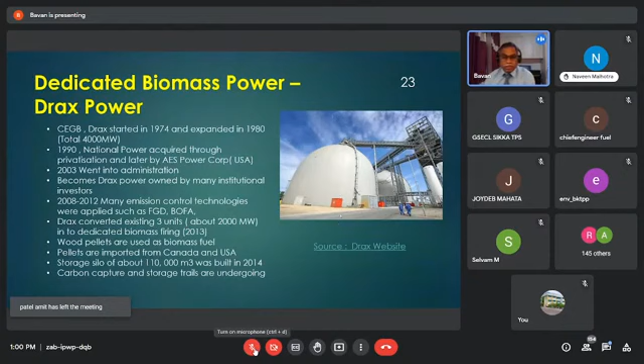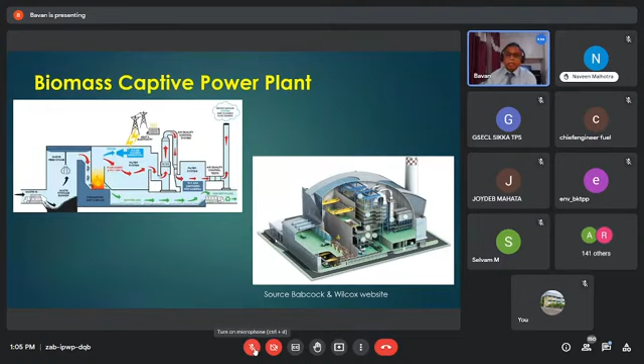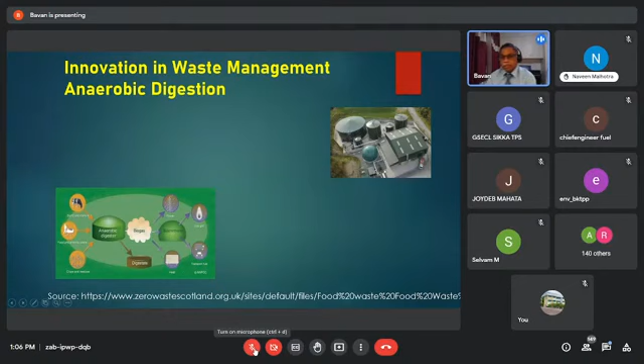Another innovation is anaerobic digestion. As I mentioned, it's not new, but it's on a large scale, and at large scale there's a digester, and those digesters are used for biogas generation, and biomethane is then used for power generation or domestic use or whatever. This is one plant, a waste-to-energy plant located in the UK.

The recommendations I would consider are: you have to think about the most cost-effective mechanism. Otherwise, it would be difficult for long-term sustaining, whether it is direct firing, co-firing or dedicated biomass. The easiest option is direct firing, and the second part is biomass availability. Here in the UK, there is very limited biomass available. We can't really sustain without biomass availability for long periods.

And minimize the value-added biomass fuel processing. If you're going for pelletization, transportation and all sorts of things, each process is energy consuming, and the overall life cycle cost will increase, and life cycle energy consumption also increases. It's not as carbon neutral as people claim, because they have considered only the power generation from their plant to the grid, but previously there are a lot of other emission factors which should be considered, but that was conveniently neglected.

That's the case. So it's not truly carbon neutral in a sense. And even if you're using existing biomass by cutting trees and other things, that means you're avoiding oxygen generation by the plants, and indirectly carbon dioxide absorption, so it's also not efficient.